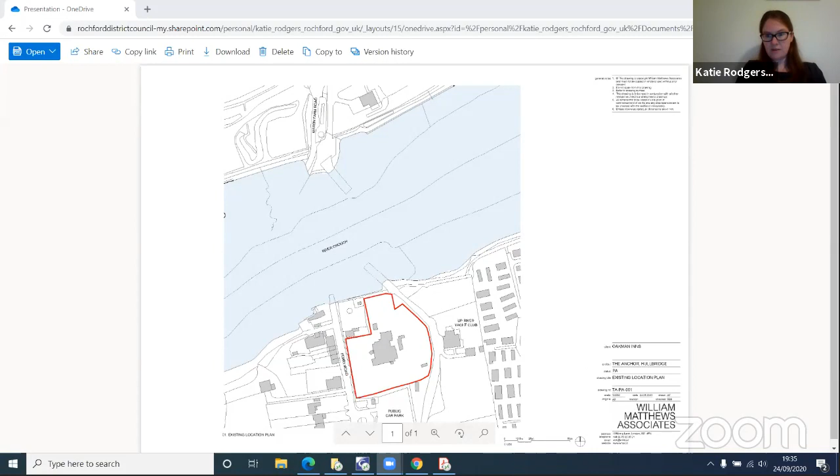The application was heard at the Development Committee in August and deferred to allow the applicant the opportunity to address issues raised by members relating to car parking, scale, and the external facing material proposed for use.

The applicant had previously proposed that the extension would be finished in Siberian larch. The applicant has listened to members' concern in relation to this and now proposes the use of ash sourced in the UK. The scale and form of the extension remain as originally proposed, although the applicant has sought to provide further justification as to the design approach.

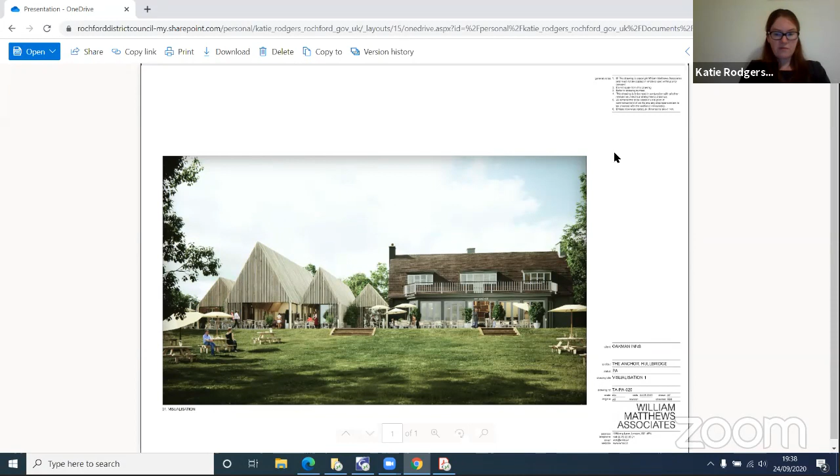This steeply pitched roof is characteristic of traditional building form and typical of design promoted by Policy DM1, which refers to the Essex Design Guide.

In addition, the applicant has provided this 3D visual image, which shows the degree of separation between the existing building and the highest ridge.

In conclusion, the applicant has addressed members' concerns relating to car parking and external facing materials and provided further justification as to the appropriateness of the proposed design. The recommendation is therefore one of approval.

It should be noted that there's a slight correction to condition 2, just to list 2 additional plans, which will be required in respect of an approval.

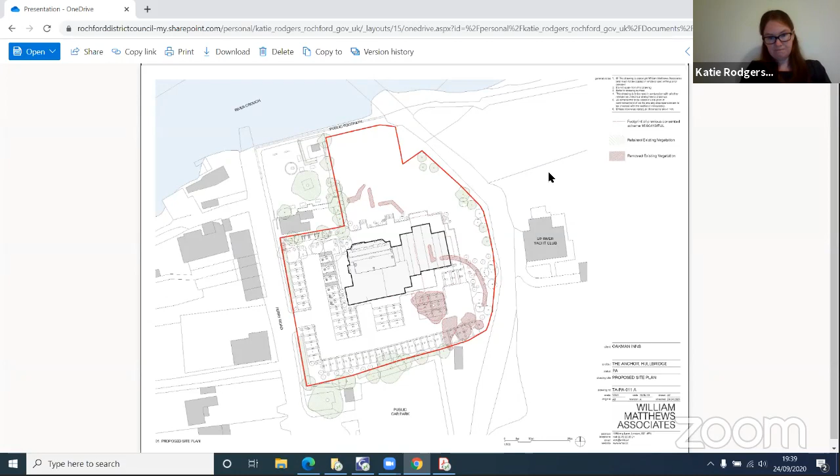Statement is from Mr. Michael Hendry of Navigate Planning on behalf of the applicant. I'd like to take this opportunity to thank the officer for a well-reasoned report and welcome the recommendation of approval.

Further to the comments discussed at the committee meeting on the 27th of August 2020, the applicant has considered the key elements raised by members, namely parking, materials, design and ridge height. I address each element in turn below.

Parking. The parking layout has been amended as requested by members and as highlighted in the officer's report. All parking spaces on the existing hard standing measure 5 metres by 2.6 metres, which is in excess of the council's minimum parking standards. All of the parking spaces on the extended car park meet the council's desired maximum parking standards and measure 5.5 by 2.9 metres.

Materials. As requested, the design team has looked again at the choice of timber cladding and proposes a UK-sourced thermally treated ash to increase its durability, and would accept a suitably worded condition in respect of external materials. It should be noted that the change from Siberian larch to thermally treated ash has doubled the cost of the cladding.

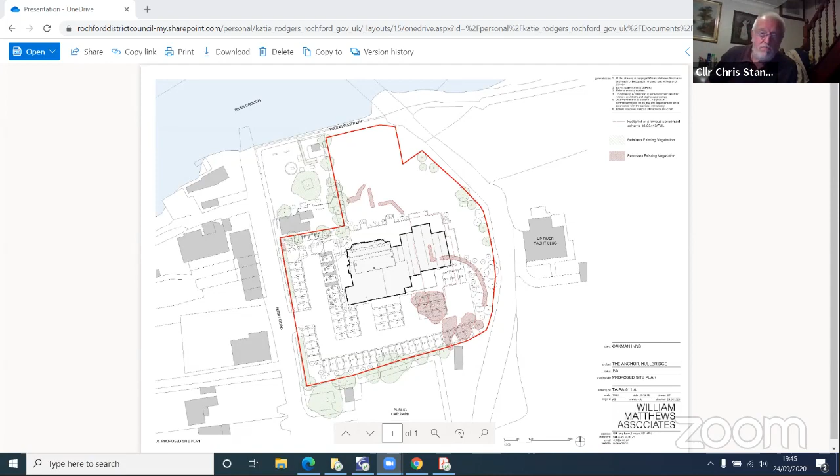Thank you, Chairman. Could I just look at the drawing that shows the roof line, and the next one that I believe shows all four roof lines? It seems to be a little bit of a differential in that, in as much as the roof is split into two - in other words, it's like a Dutch roof, the way it's presented. Is that going to be built like that? You've got it graduated into two pieces in the roof line, whereas it doesn't show that on the main drawing. So which one is right? Is it going to be a complete roof on that angle all the way down, or is it going to be a split roof?

The item on your left-hand side is the existing, the one on the right-hand side is the proposal. Okay, right. So the other question is, what difference would it make if the apex or the top of the larger building was brought down to the same height as the original building - what would that do to the architectural deliverance of the surrounding scenery?

On that one, Councillor Stanley, that's not the proposal that is in front of us to determine. That's a subjective question, so I'll have to steer on that one - we can't take that into account. We must take only into account the proposal that's in front of us, please.

Okay, thank you, so that was my comments. I'm more than happy to understand the proposal of not using Siberian larch but using ash, which is accommodated in this country, and it gives those that are supplying and manufacturing the product for this development - the developers have recognised that, and I wholeheartedly agree with them. It keeps employment in this area.

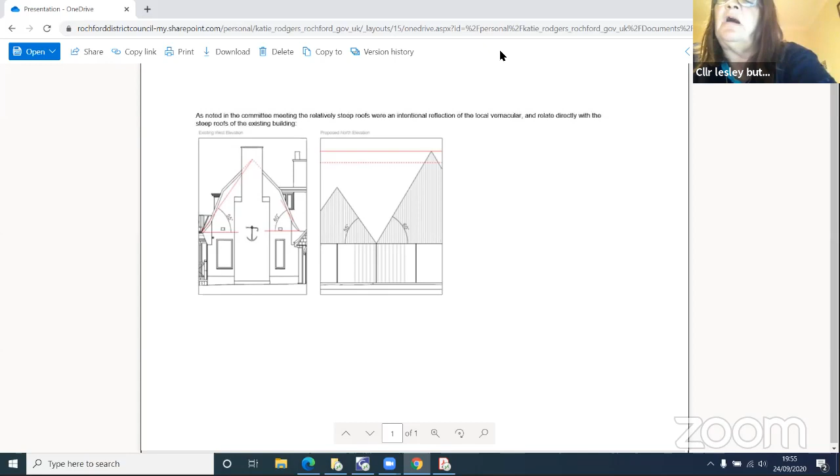For the application. No recorded vote, and against. Thank you. Councillor Eaves. No recorded vote and abstain. Thank you, Chair.

Abstain. Thank you. Councillor Hookway, no recorded vote and for the application. Thank you. Councillor Merrick, no recorded vote, abstain. Thank you. Councillor Mrs. Shaw, no recorded vote and for.

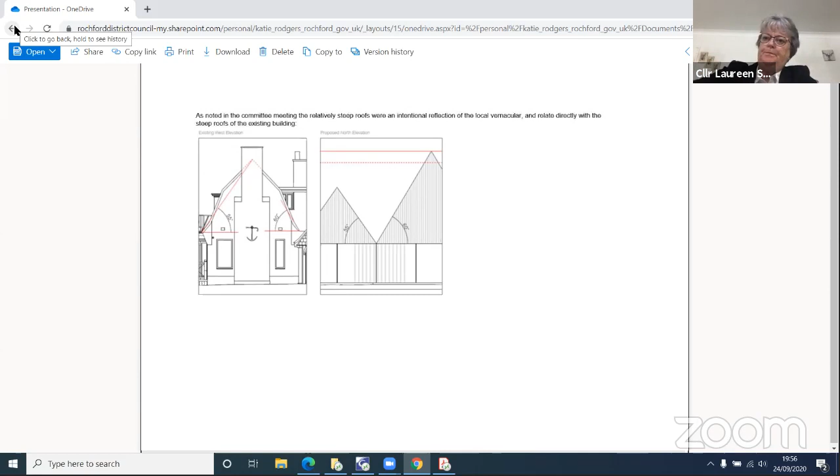Councillor Mr. Shaw, no recorded vote and for. Thank you. Myself, no recorded vote and for. Councillor Stanley, no recorded vote and for. Thank you. Councillor Williams, thank you Chairman, no recorded vote and for.

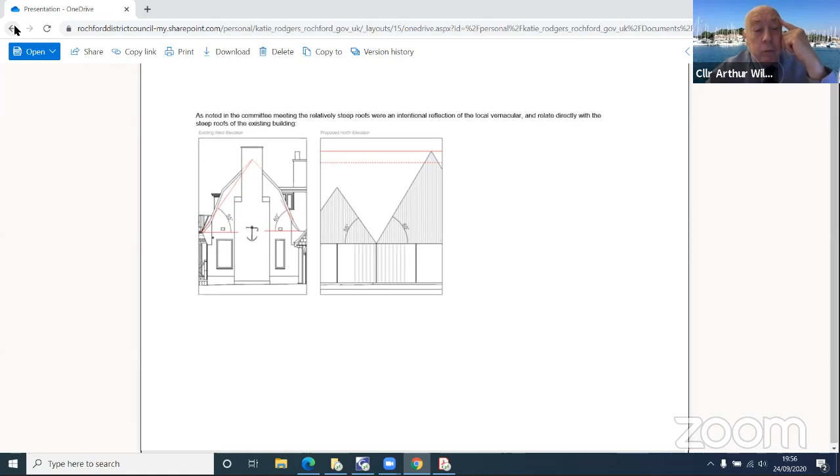Councillor Wilson, no recorded vote and for. Thank you. That item is approved. Thank you.

We'll move on now to an item that wouldn't normally come before us, but this is an officer's application, 88 Parklands, Rochford, and Katie's going to present on this one again for us. This application relates to a residential property at number 88 Parklands and is before members as the applicant is an employee of Rochford Council. This is an application for a non-material amendment. This type of application allows the applicant to seek to agree minor changes to an approved scheme without the need to reapply for full planning permission. The decision must be based solely on whether the proposed change is so minor it could be regarded as having no material effect compared to the approved scheme. No public consultation is ever carried out in relation to these types of applications.

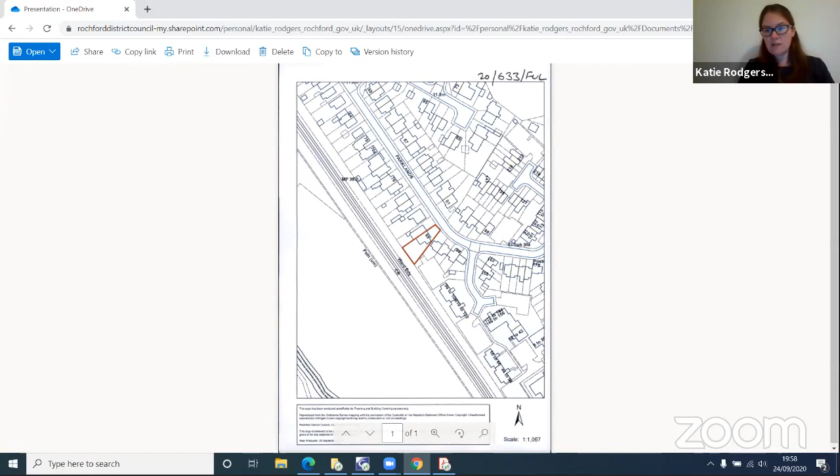In this case, the original planning permission approved was for a single-storey side extension. The change the applicant proposes is a reduction in the width of the side extension by approximately 1.2 metres to the front elevation, as shown here. This change is necessary to avoid a drain that cannot be built over. The height and design of the proposed extension would remain as approved. The change is considered so minor as to qualify as a non-material amendment, and the recommendation is therefore one of approval.

Thank you. Does anyone actually want to comment on this one? No. Okay, we will go straight to the vote then. The recommendation is on 7.1 and the top of 7.2. So we'll go straight through again.

Thank you. Councillor Mrs. Shaw, no recorded vote and for. Thank you. Councillor Mr. Shaw, no recorded vote and for. Myself, no recorded vote and for. Councillor Stanley, no recorded vote and for. Thank you. Councillor Wilson, no recorded vote and for. Councillor Williams, no recorded vote and for. Thank you, Chairman.